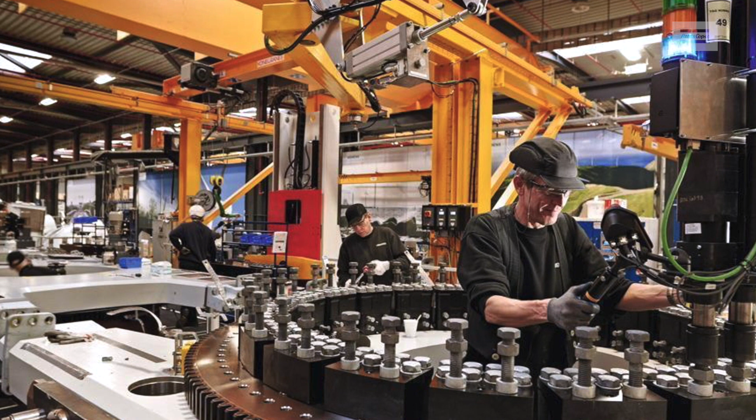Wind energy is catching up with the use of smart tooling in most new manufacturing facilities. But what happens in the field, where a significant amount of critical bolting operations take place that have a direct impact on turbine performance, reliability, and cost?

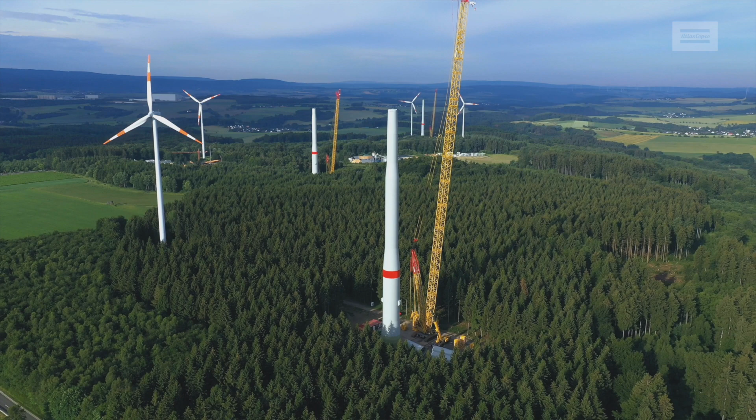The reality is that in many cases, conventional bolting methods are being used due to old processes remaining in place, outdated tool fleets, and a general lack of awareness of exactly how smart factory thinking can really be applied in the field with the technology and solutions available on the market today.

In order to really capitalise on the full value Industry 4.0 can bring, the wind sector must now drive a transformation in how critical bolting is done across the full value chain. The wind energy sector can be broken into three main areas: the first being manufacturing, followed by construction or installation, and then of course maintenance, which may continue for many years.

As we have already said, the terms Industry 4.0 and Smart Factory are well known within manufacturing, so let us first take a look at how Industry 4.0 is being implemented in assembly in other industries.

Industry 4.0 stands for the fourth industrial revolution. The first was the introduction of mechanisation, such as the steam engine, to replace manual work in the second half of the 18th century. The second was the electrification and the division of labour from 1870 onwards, symbolised by the assembly lines of Henry Ford.

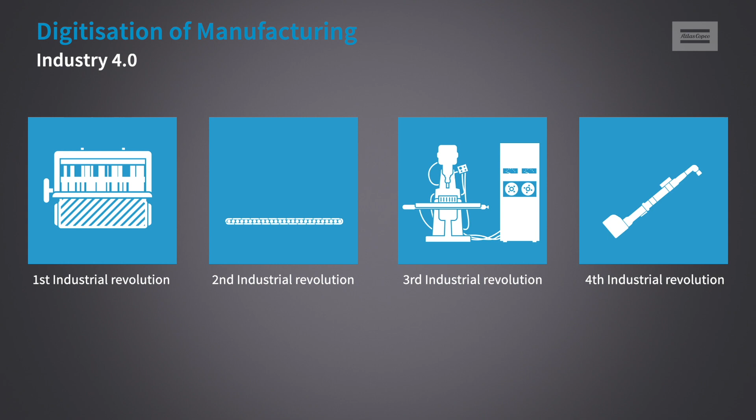The third was the introduction of computers and automation for production processes in the 1970s. And now, in the current time, Industry 4.0 is the cyber and physical systems merging, the real and virtual worlds merged in production. Let's now consider how this looks in a typical assembly line today.

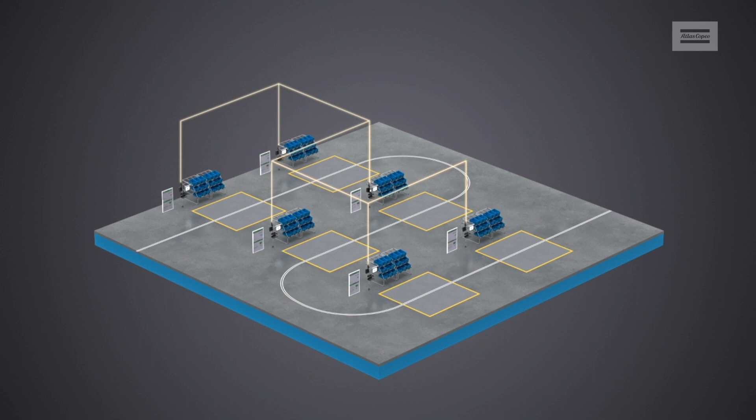For easy reference, in this case, we will use an automotive production line. As you can see, the cars move along through the production line from one workstation to the next. In each workstation, work is carried out by tools and equipment that have integrated sensors and communication capabilities.

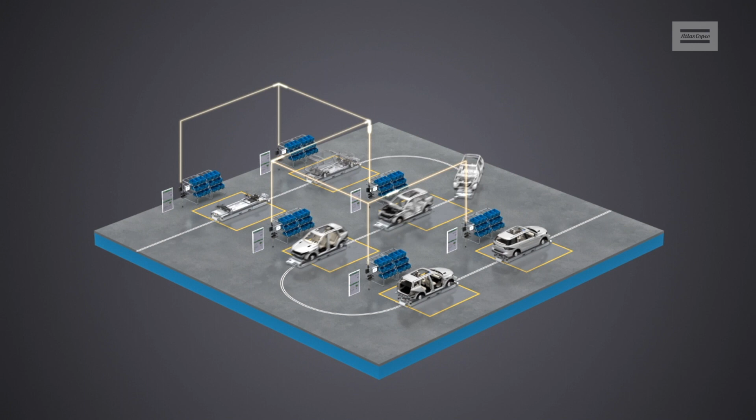This enables data and information to be sent to and from each workstation. This can provide instruction on what needs to be done, or document the results of what has been done. The connectivity of the system means that tools, equipment and systems are communicating with each other to optimize performance of the production line and ultimately the production output.

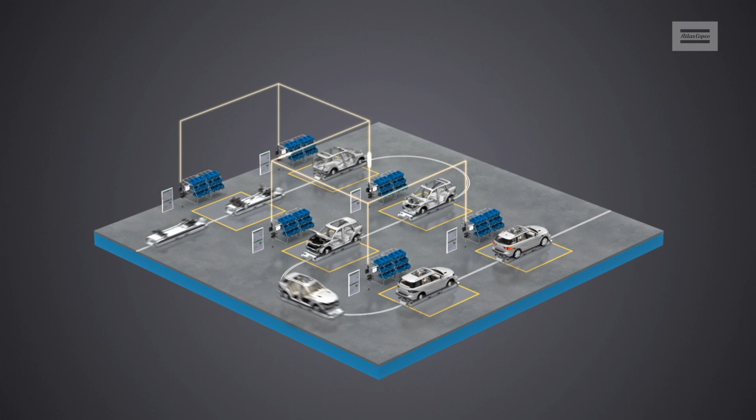If we look even closer at the assembly line and move into a typical assembly workstation, we can see the types of solutions being used to carry out the work. A workstation consists of the tightening or fastening tool itself, such as an electric nut runner, but this is only one part of the solution.

The tool also has a controller, which is the brains of the system and can enable multiple tasks or operations to be programmed or configured. To start the work, the operator has a barcode reader integrated into the tool, and he must scan the vehicle identification number before the tool will become active.

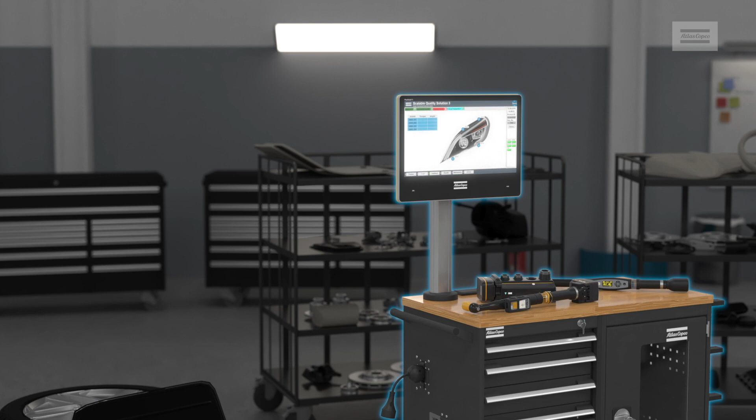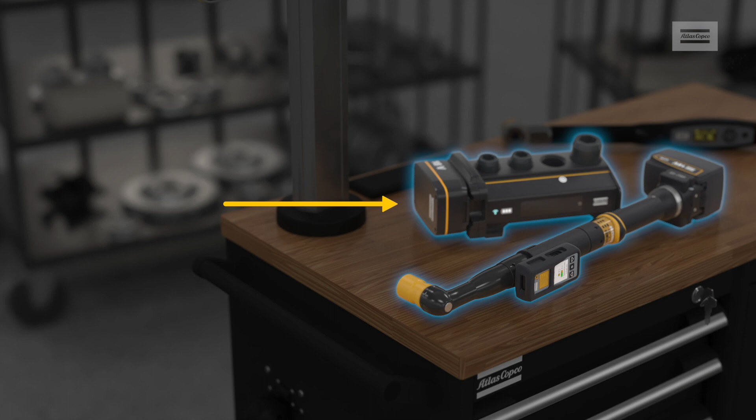There is an HMI that provides on-screen guidance on the tasks that need to be done and the order it should be done. Furthermore, there is a tool selection tray with different sockets which can guide the operator which socket is needed on which application.

During the entire work, status can be viewed by the operator using visual light towers or feedback provided directly on the tool or in the HMIs. This ensures that the right work is done and no mistakes are allowed to pass through. It also ensures that if any errors do occur, then the operator is guided how to rectify it.

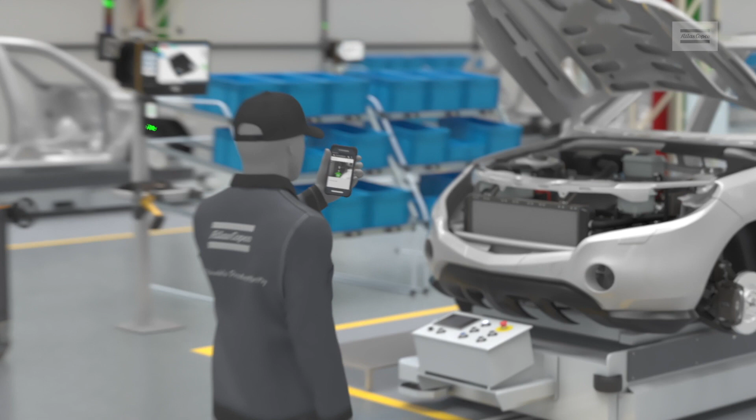In all of these instances, there is a digital record of exactly what has been done, which can be traced back to the specific vehicle, equipment, parts, or even the operator.

All the data that is collected in each workstation can be sent via the factory network to a central location, or indeed any location which is connected. This provides full traceability of all fasteners in the vehicle, which can then be stored for the full life of the vehicle.

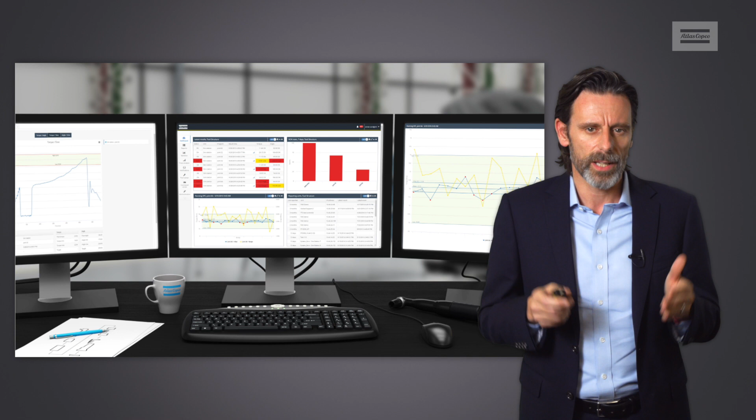Not only does this provide a record of what has been done, but by gathering other data such as statistical error reports, failure trend analysis, or tightening graphs, the data can be used to identify potential problems early, before they happen, or to detect quality defects in components.

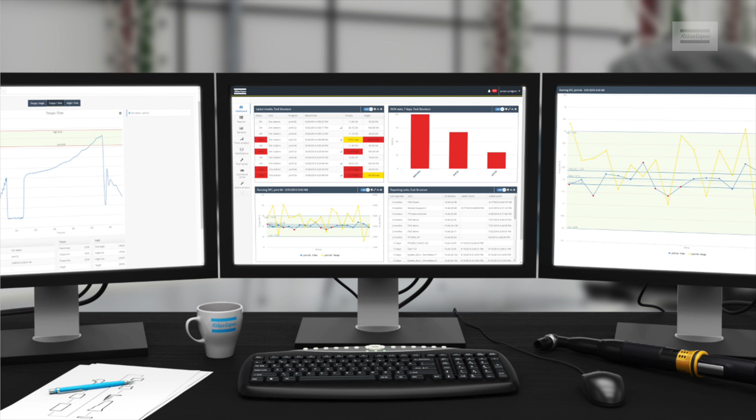It can even establish that tools or equipment need to be repaired or maintained before there is an unexpected failure on the line. These benefits not only provide peace of mind, but enable continuous process optimization, resulting in reduced quality costs and improved quality output. Smart connected assembly and manufacturing has created many benefits.

Industries such as automotive and electronics have experienced great improvements in productivity and quality control from digitization in production. This is why today's products such as cars or smartphones are more complex than ever, but are produced at lower cost and with a quality level far above levels we've ever seen before.

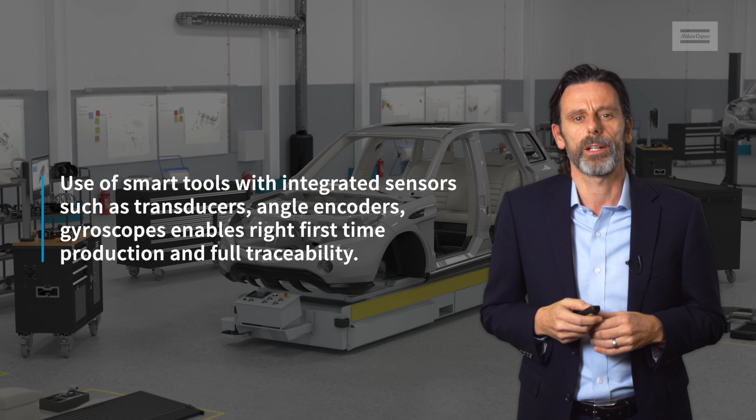Use of smart tools with integrated sensors such as transducers, angle encoders and gyroscopes enables right first-time production and full traceability. Interconnectivity enables sharing and analysis of data across departments and even locations in real time.

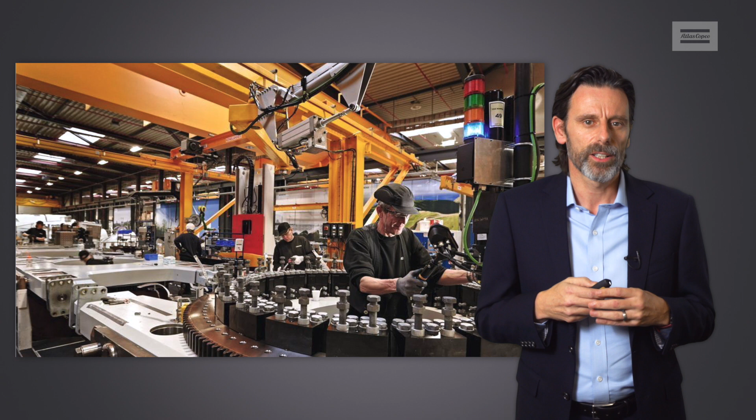If we consider the wind industry, we can see in new production facilities such as nacelle or gearbox production that smart tooling and systems are now being used. This image shows a real plant where advanced electric nut runner systems are being used, which has an HMI for the operator, sensors in the tools, and status lights above provide direct feedback.

There are also controllers connected to a factory network. This is very much in line with other industries and shows that wind OEMs also start to see the same benefits of smart tooling within a manufacturing environment.

But what about the operations and maintenance? The potential benefits are huge by using technology and process available on the market today. In the field, if we could increase productivity, reduce the number of defects, and increase the uptime of equipment, this would result in...

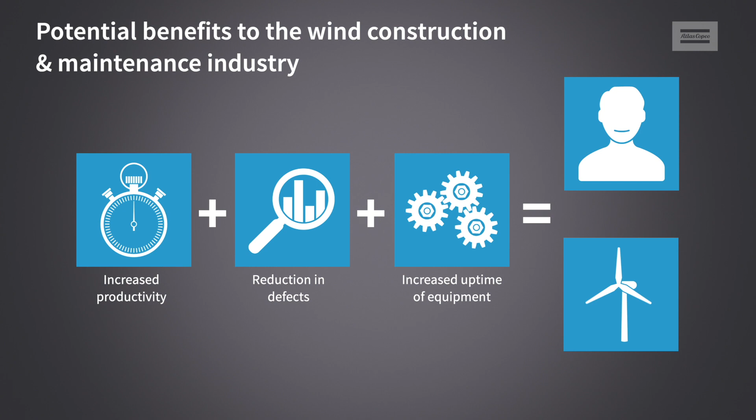extremely happy wind OEMs, operators and owners by ensuring that turbine and farm output is maximised. So why haven't we seen this happen yet?

The reality is that in the field there are challenges due to the work environment that differ from those inside a factory. On site, safety is a priority due to high torques, working at height and heavy tools.

Also, time is money because of crane time, ship time, weather windows and project deadlines. And it's extreme work environments with extreme temperatures and very remote locations.

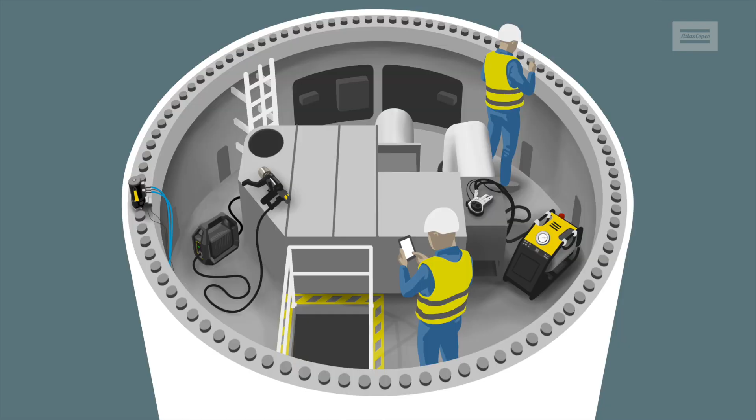The work environment has many different tool types to secure bolts, such as hydraulic wrenches, bolt tensioners, electric nut runners, battery tools, and even manual torque wrenches. These use very different technology and even have their own unique process.

Furthermore, these are often supplied by several different manufacturers with their own technology, resulting in added complexity for operator training, calibration of equipment, and tool maintenance.

This creates a significant challenge when it comes to documentation and traceability, which today is mostly done using manual methods. There is no doubt that the human factor will affect the results, and so the combination of difficult work environment...

and complex tool procedures can result in documentation that is prone to mistakes. And when it comes to critical bolting, mistakes can be catastrophic.

In order to reduce the risk of mistakes or errors in the field, there are well-established processes in place to control that work is done in the right way. However, failures still happen. This is because the work is labour-intense, manual operations are carried out by humans who are error-prone.

Information is often in silos and not shared transparently between parties, and there is a lack of real traceability. It is the goal of all stakeholders to eliminate mistakes and secure that processes are followed.

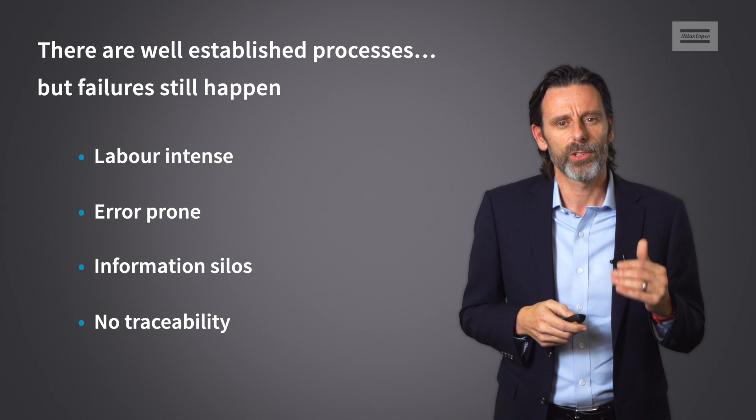But to understand how this can be achieved, first we must consider some of the basic theory around bolted joint assembly.

When we think of a bolt, we can think of it like a spring. As the bolt is loaded with force, it acts like a spring and stretches, producing clamp force, which holds the components together.

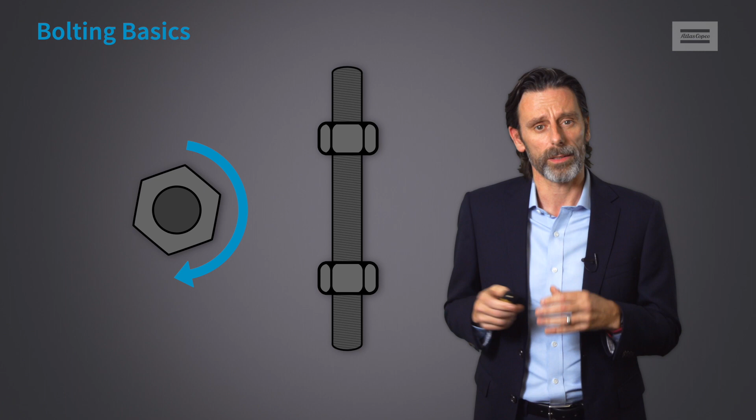Although we want to measure the clamping force, this is not easily done, and so typically we measure torque by rotating or tension by stretching, since these can be correlated to the force needed to secure the joint.

Applying torque is the most common because it is a well-known process that can be well standardized. However, the results of using torque can be affected by friction.

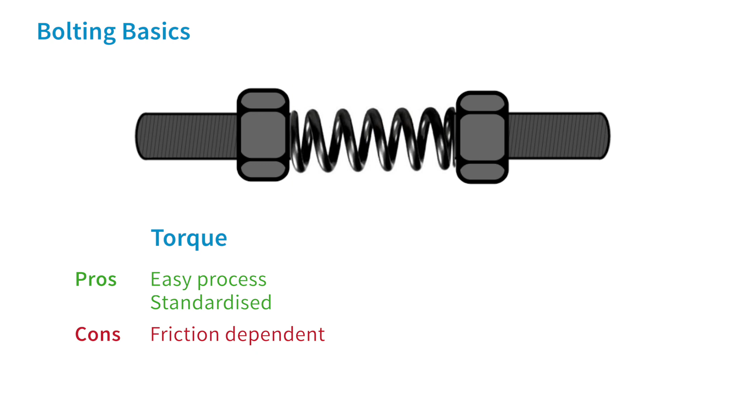The most common alternative to torque is tensioning, which can be more accurate because it is not affected by friction. However, load losses can occur in the process.

These two methods are used in almost all fasteners inside a wind turbine. For example, tower sections are typically torqued and foundations and blades are typically tensioned.

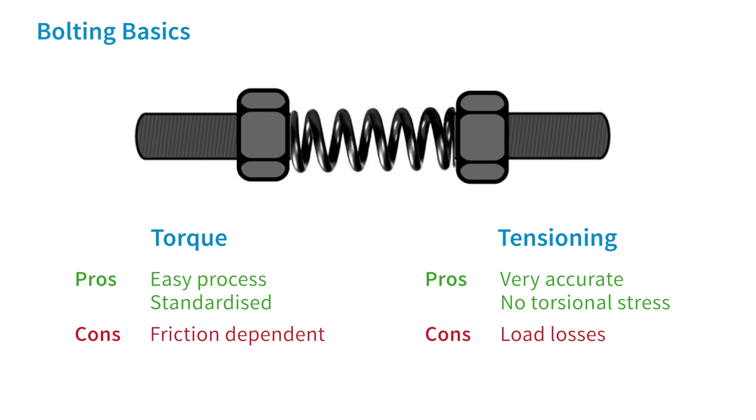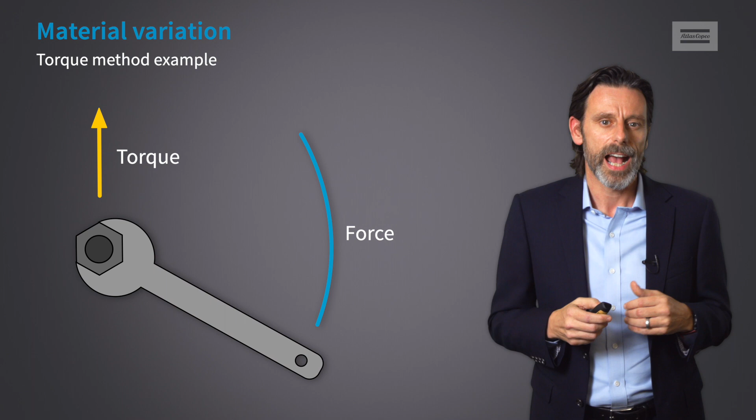If we consider the torque method, we have to think about material variation. So when we apply a torque, the torque increases as the force on the lever increases. However, when the bolt is turning, it creates a friction in the threads and under the head.

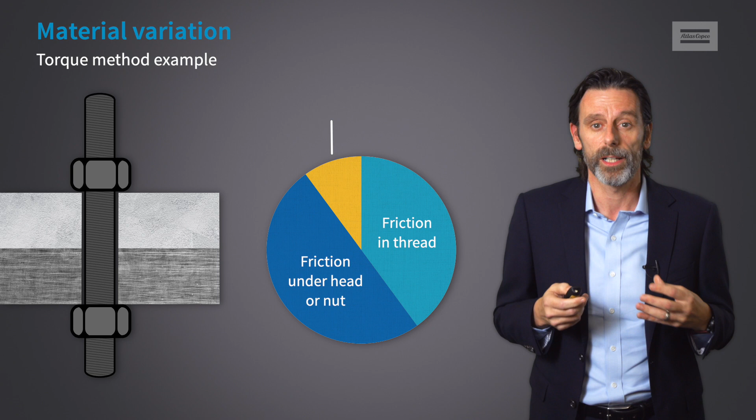Since 90% of applied torque is used to overcome the friction, it means only 10% of the applied torque results in clamping force. This in itself is not an issue, since it's known and joints can be designed for this.

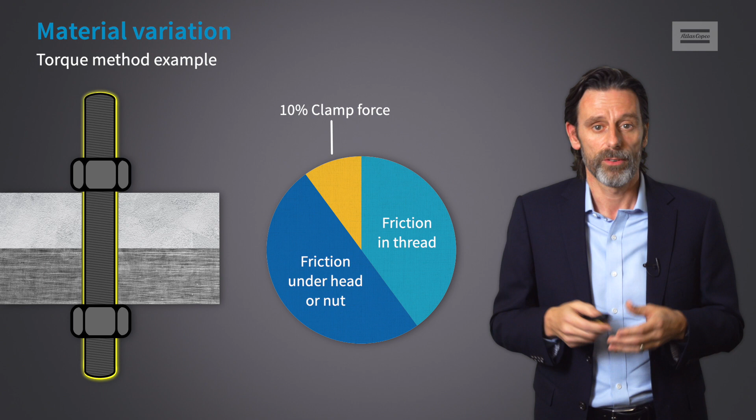However, the material variation can play a part. For example, any lubrication added to the parts will result in less friction and subsequently a higher clamp force. Vice versa, removal of lubrication could have the opposite effect.

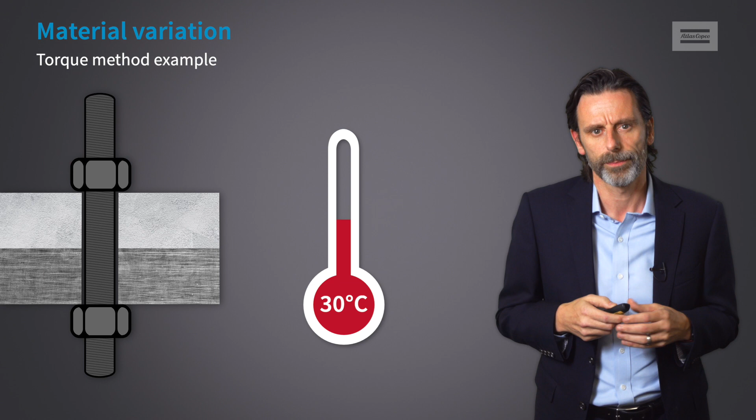Likewise, external factors such as temperature changes can affect the material properties, resulting in friction changes that will ultimately change the resultant clamp force in a joint. The challenge, therefore, is how to know if there has been any change in the material properties.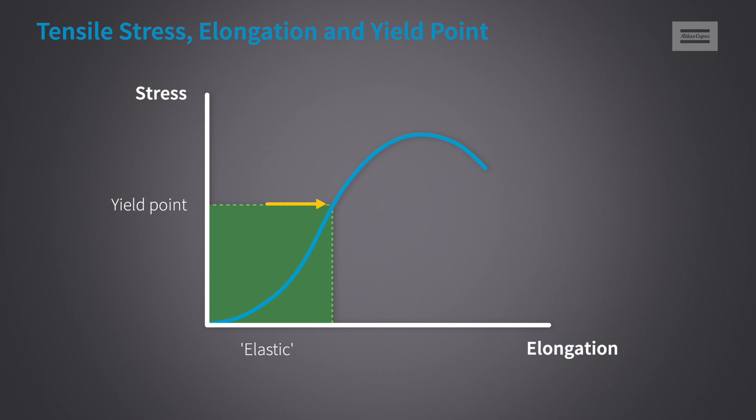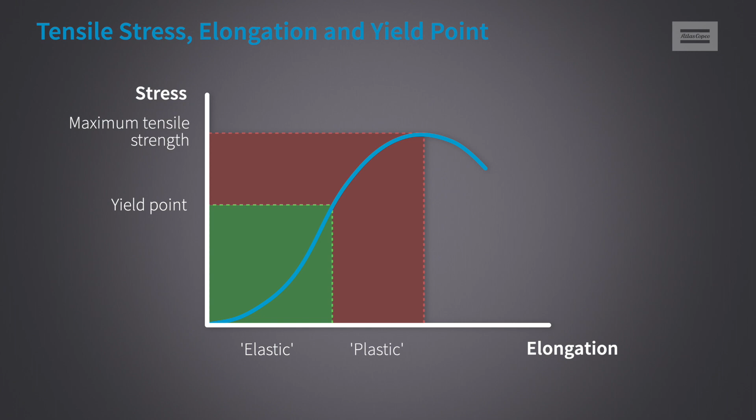If we look at this graph, we can see how the tensile stress is built up in a bolt as it is tightened. As the bolt turns or is stretched, it is in the elastic zone until it reaches its yield point, which is the optimum point in the bolt where the stretch is creating the highest clamp force. However, if we continue to stretch a bolt beyond the yield point, it will move into the permanent deformation zone.

Which means that it cannot return to its original form and ultimately fails. This means for the best performance of a joint, we should aim to be as close to the yield point as possible without going over. The challenge here is how to ensure that tools and equipment used are accurate enough to achieve exactly the right result time after time.

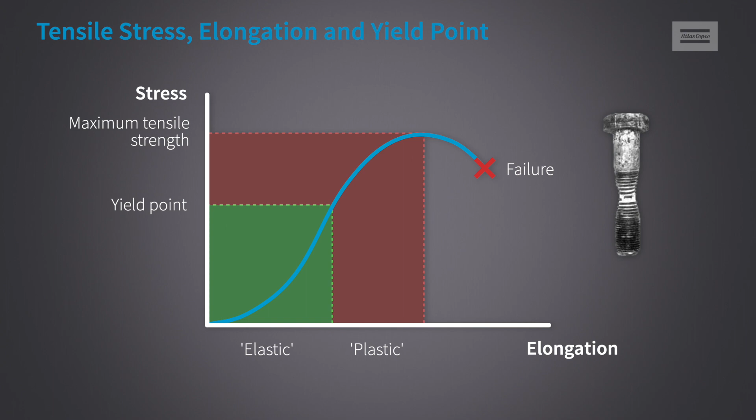When talking about the torque method, we have seen that the turning of the bolt creates a friction in the joint. Therefore, if we can not only measure the applied torque, but also measure the angle of rotation, then this would help us to secure that not only is the right torque being applied, but also that the material variation is consistent. For example, we can detect any changes in friction that may occur.

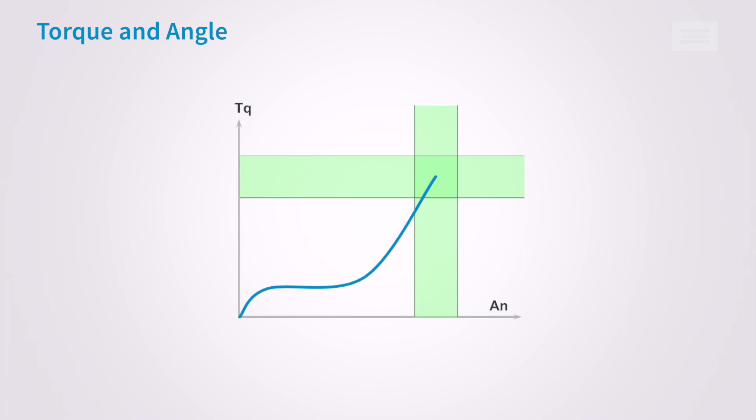The examples here show the following. The first graph on the left shows a tightening which is exactly the right torque and angle. This means that we know that this joint is okay.

In the second chart, in the middle of the picture, it shows a tightening which has the correct torque, but the angle is low. This could be the result of increased friction due to damaged threads, for example, which would result in insufficient clamping force and a loose joint, even if the correct torque was applied.

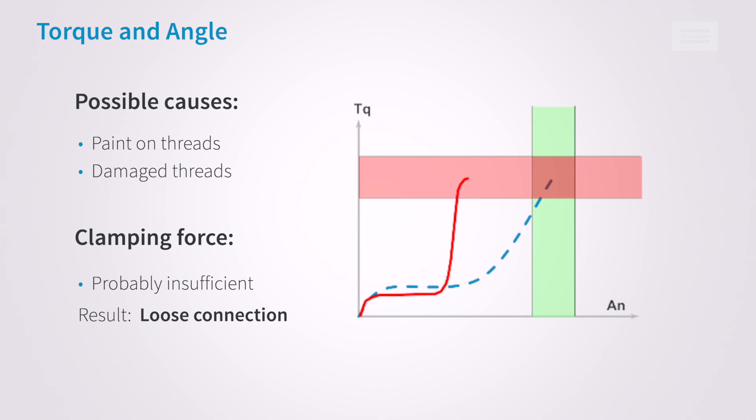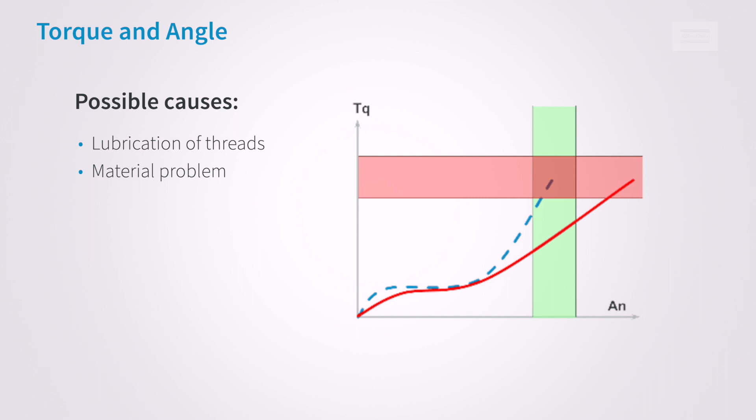The third graph on the right shows once again the correct torque, but in this case the angle of rotation is too high. This could be due to excess lubrication on the bolt, which could then result in the bolt going beyond yield and ultimately failing despite the right torque being applied.

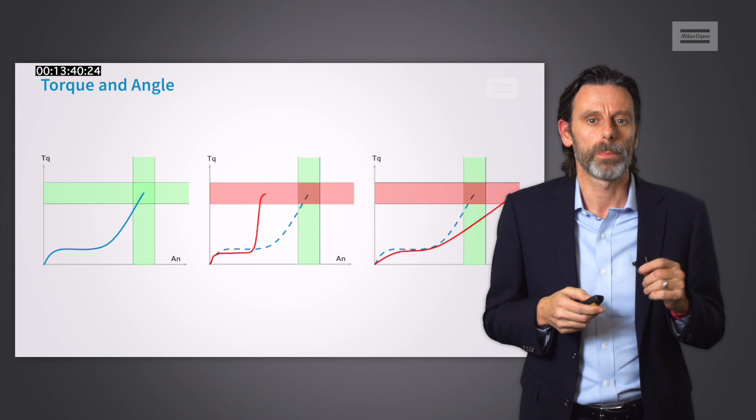What this shows us is that in order to secure the right bolted joint assembly, you cannot rely on applied torque alone. As we have seen, the torque method can result in challenges to secure the correct clamp force. This is why we often see the use of bolt tensioning in applications which are extremely critical or under extremely high load.

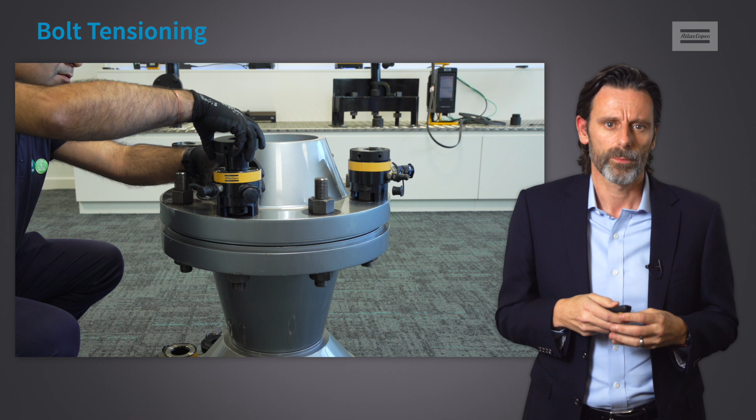Bolt tensioning uses hydraulic pressure to stretch the bolt without rotating it, and as such this eliminates the effects of friction. This can result in achieving very accurate results, which are very consistent if the process is followed correctly.

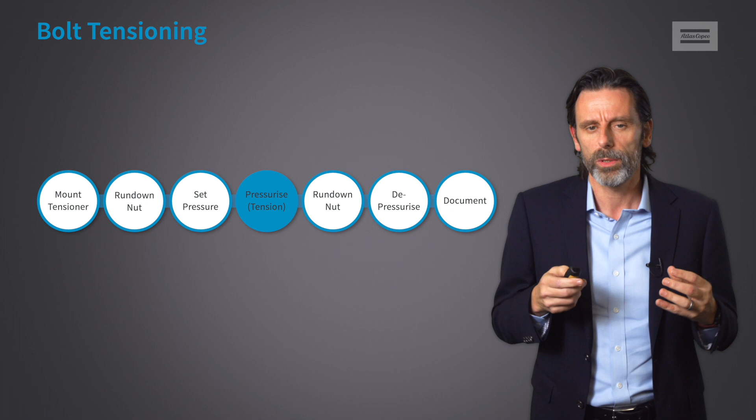The key part of the tensioning process is of course the pressurization that creates the elongation and tension, also known as the clamp load. But tensioning consists of many more operational steps, and they are all critical.

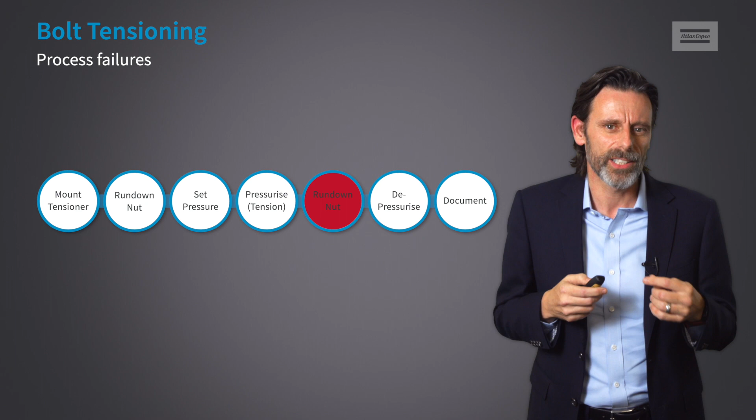What if the operator simply forgets to lock the nut after pressurization? That would lead to zero clamp load in the joint. This is not an uncommon mistake, as we have heard from many operators, and so this creates a challenge in the reality of the work environment.

So, although tensioning may be seen as a more accurate means of achieving desired clamp force, the process is more complex and it relies on several manual steps with a lot of human interaction.

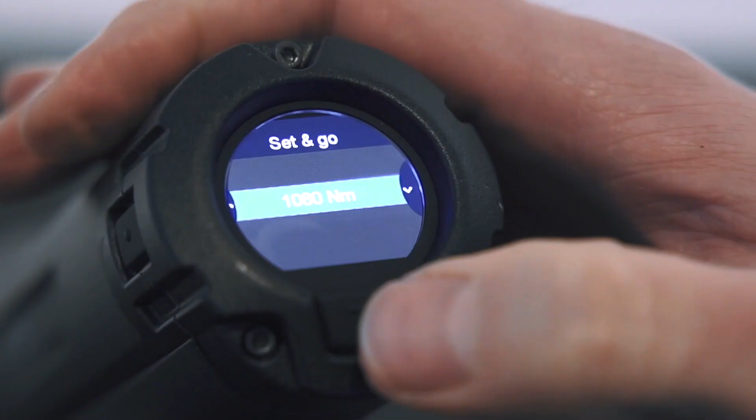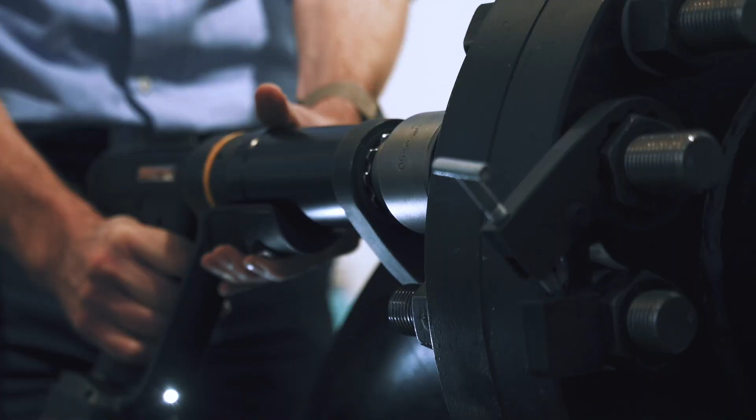What we can conclude from this is that independent of which tightening method is used, i.e. torque or tension, the result is fully dependent on both the right material being used and the correct process being followed. To ensure this, tools and equipment that can measure the material variation, such as torque and angle, and can give feedback to the operator on process steps, must be used to be sure that the result is according to the desired specification.

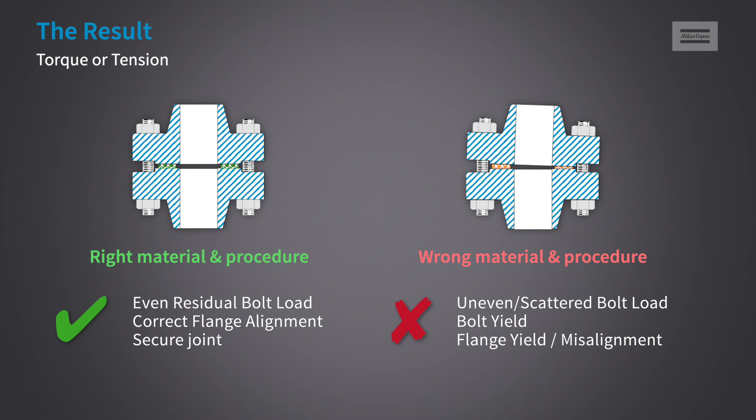Manual tools and human operators provide too many variables and risks. Even if operators have been trained on the right process, material factors can also influence the result. To mitigate these risks, the use of smart tooling with integrated sensors and process guidance can address these needs today, regardless of the method used, torque or tension.

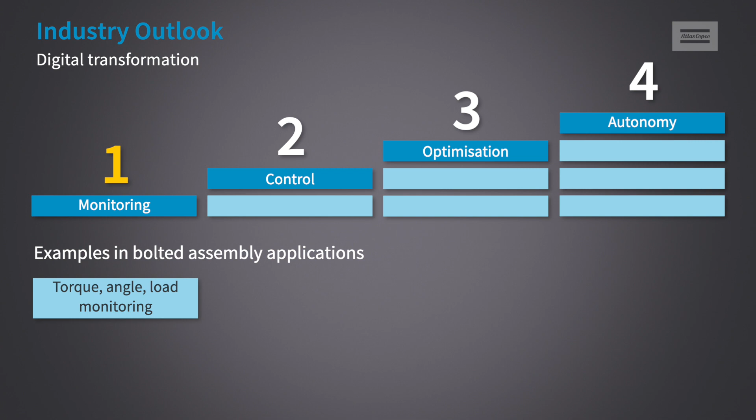Examples of transformation related to bolted assembly are, first, monitoring, where we can monitor torque, angle, load, temperature, time to understand what is happening in the joint. Then there's control - torque, angle, load, batch or rehit - where we can control the process to secure that things are done correctly. Then there's optimization using data analytics and intelligent service indicators to improve performance and equipment and service life.

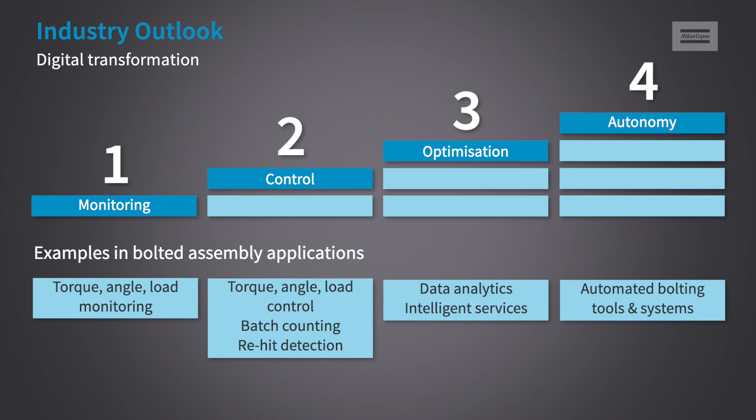Then we have autonomy, the use of automated bolting tools and systems to remove the human element and create even greater efficiency. We believe there will be a transformation in the energy segment, but it's difficult to predict at the speed at which it will happen.

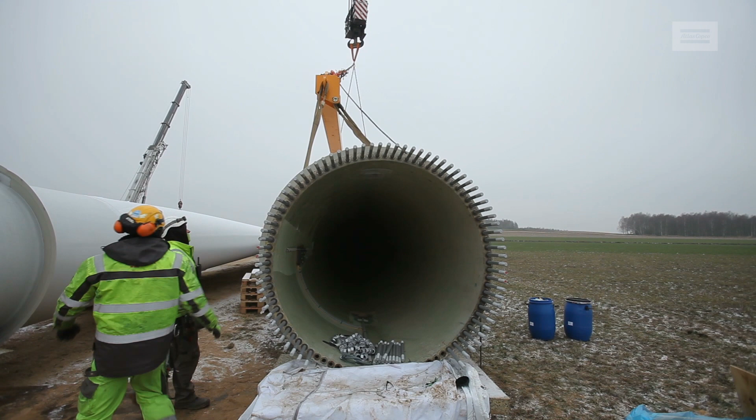It very much depends on how quickly OEMs adopt the mindset that smart factory thinking can and should be applied in the field. When considering why smart factory technology has not been widely adopted in the field-based environment so far, the answer is that technology enablers were not in place until recently.

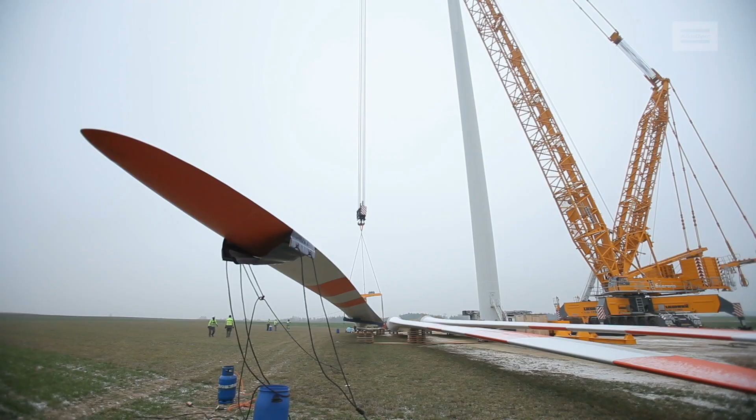To utilize sensors, communication and connectivity in the field, it was not only necessary to introduce smart tools, but also the infrastructure to connect and interact with the products to gain the true advantage they offer. Technology advances in the area of smart devices, mobile connectivity and cloud computing create new possibilities today and have enabled the transfer of smart factory solutions into different work environments.

One simple step to introduce smart tools into the field is to identify applications which require not only the correct results, such as torque, but also can benefit from process control.

For example, wind tower sections are typically assembled using the torque method. Historically, hydraulic torque wrenches would have been used, but these are notoriously slow to operate and they don't have direct torque measurement. Furthermore, there remains a strong reliance on the operator to follow the right process.

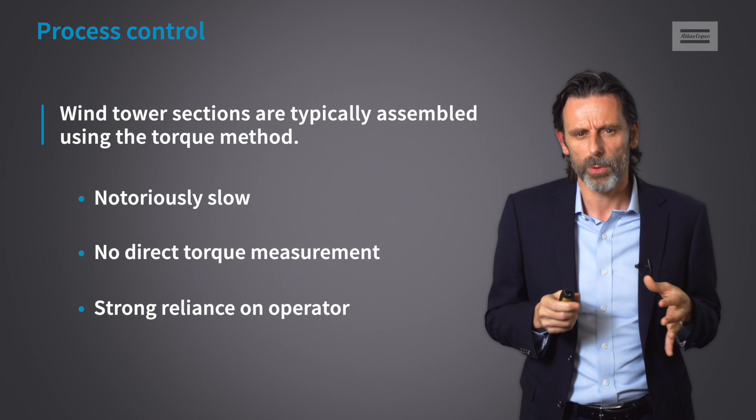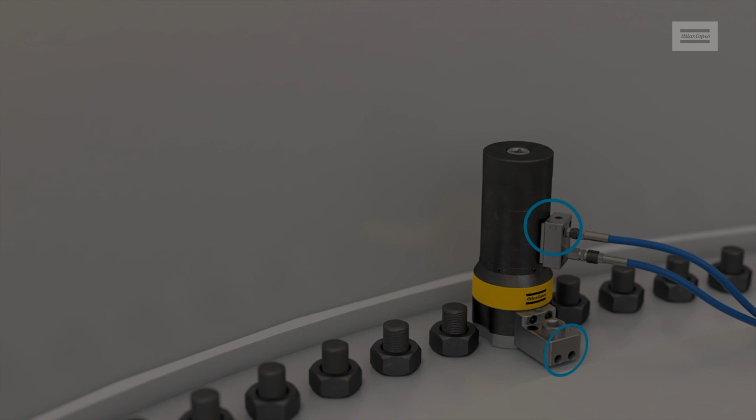This can be complex when there are up to 100 bolts per flange to be tightened. Introducing smart electric and battery tools to this application can secure it is done both quickly and right first time.

Since the assembly process requires many bolts to be tightened in a defined sequence, the tool can guide and count the bolts. Integrated sensors measure all parameters of the process and provide feedback to the operator in real time directly on the tool via HMIs.

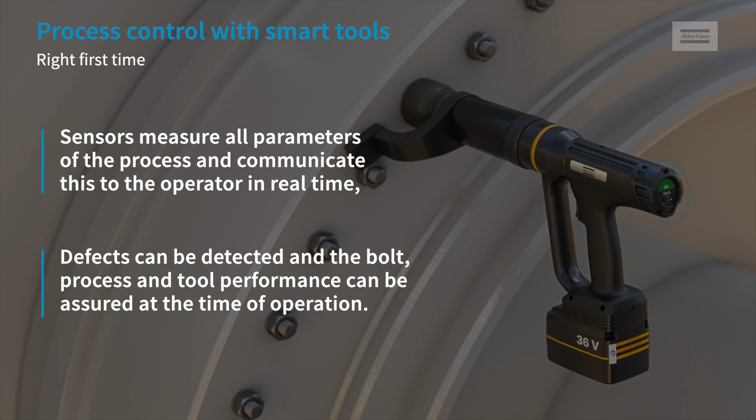Then the tightening data can be transferred automatically to a mobile device that connects directly to the tool, allowing digital record to be saved and shared instantly at the time of application.

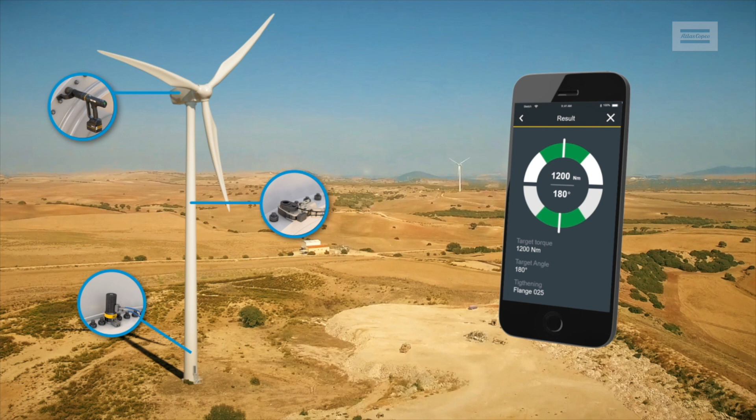By using tools with sensors built in and capturing a digital record of the work being done, which is then connected to the equipment that did the work, there is full traceability of the process data. Process and tightening data can be saved and shared with other sites or stakeholders.

For example, all tightening data collected during construction could be shared with the commissioning team or service crews. This could result in a reduction in the number of service checks needed. Real-time data on bolt and process status can be collected, analysed and shared instantly, even today, enabling rapid problem resolution and continuous process optimization. This very simple example shows how on the surface it appears that the job was done correctly with the correct torque, but there is a defect that could cause a problem in the future.

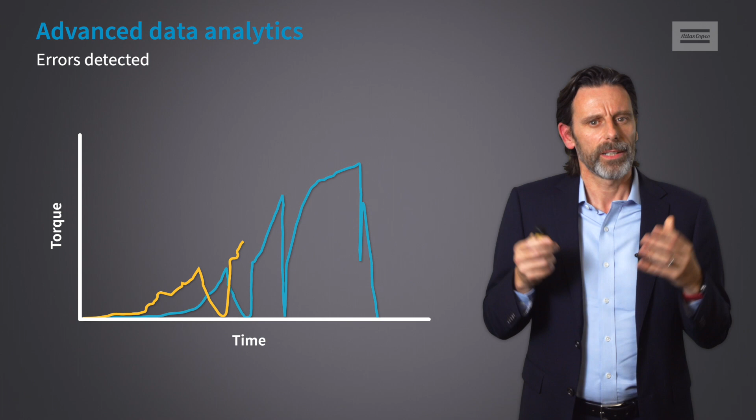On the graph we can see that 2 tightenings have been done, which have been built up in 3 steps. In each step the final torque achieved was the same. However, in the first 2 stages we can see the torque curve was different.

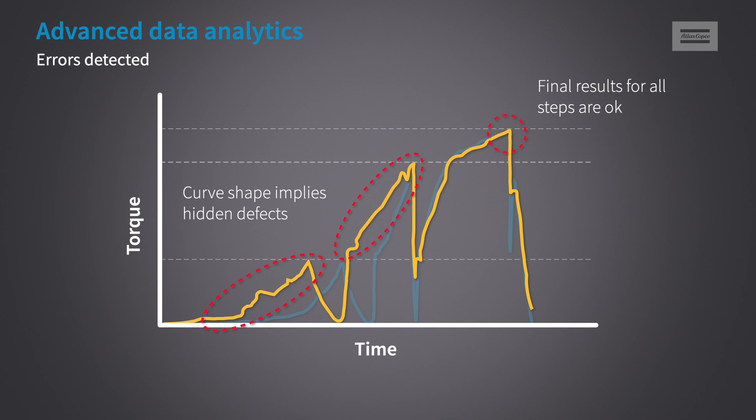This is an indication that there is a variation which could be a material defect that could result in a failure at some point in the future. Having this visibility allows us to check this in more detail and repair if necessary, before a much more significant failure occurs in the field. Data analytics can identify this and resolve potential issues before they become major problems.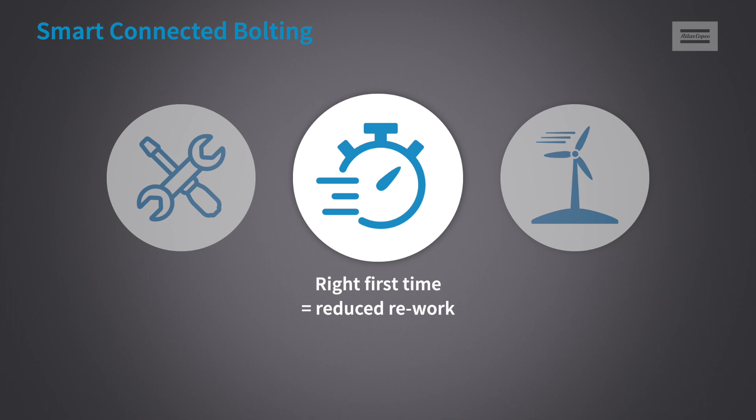Smart connected bolting can realise huge benefits for the wind sector if applied across the full value chain. Reductions in construction and maintenance time, right first time construction with reductions in rework, predictive service in tools and equipment will increase uptime, digital documentation leads to less manual operations and full traceability, and data analytics enables continuous process optimization.

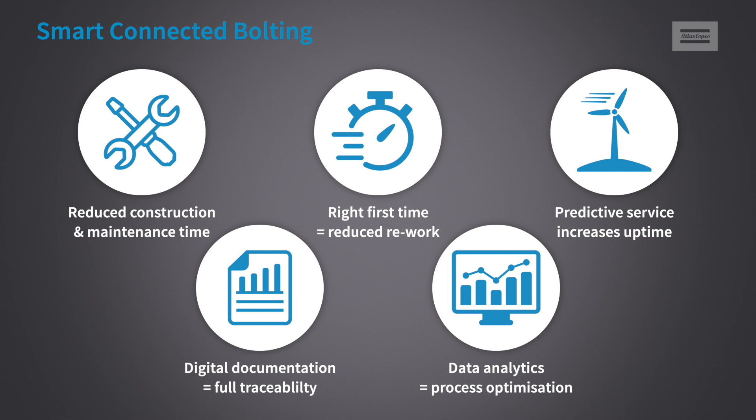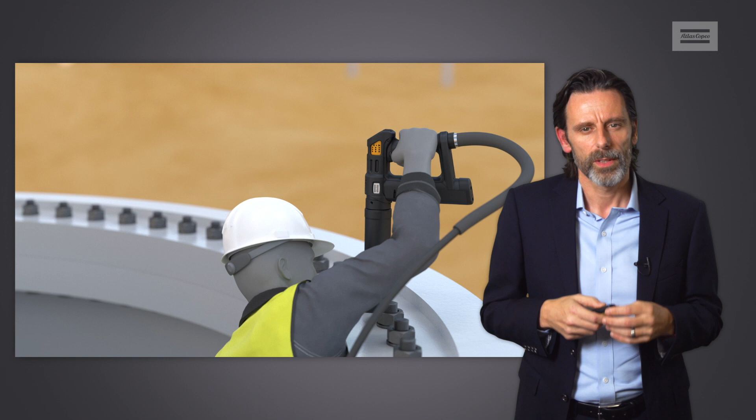Solutions and technology to make this a reality are available today, but the first challenge is to create a culture change in how bolting work is done in operations. Industry 4.0 solutions and smart factory thinking must also be applied in the field. If this can be achieved, the benefits will have a major impact on quality, productivity and cost reduction in exactly the same way that have transformed other industries during past years.